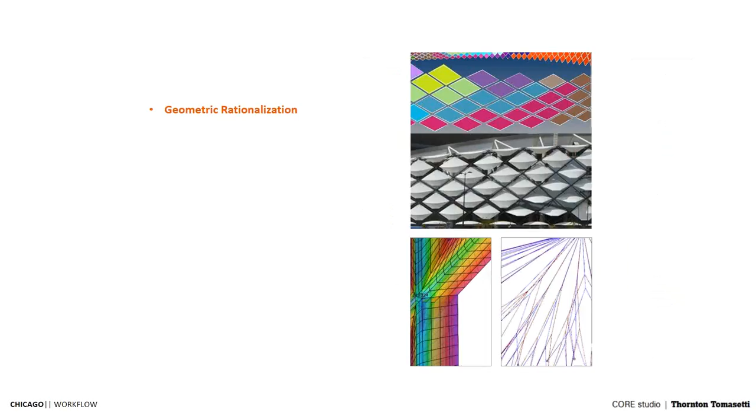So some of the things that we do in the group: geometry rationalization, fabrication modeling, integrated building analysis. This is like building platforms in Grasshopper and other software to do analysis and have this automation. We do software development. We've been doing a lot of work with Dynamo, Grasshopper. So if you want to download this information, Food4Rhino would be a good avenue.

We put the software out there. It's for free. Most of our Dynamo add-ins and plugins are free as well. We do a lot of work with Autodesk, and anything that gets built in the additional releases, we put some input. So if you have inputs, if you know something that might be interesting, you can send me an email, or I can give you the email of one of the guys in our group.

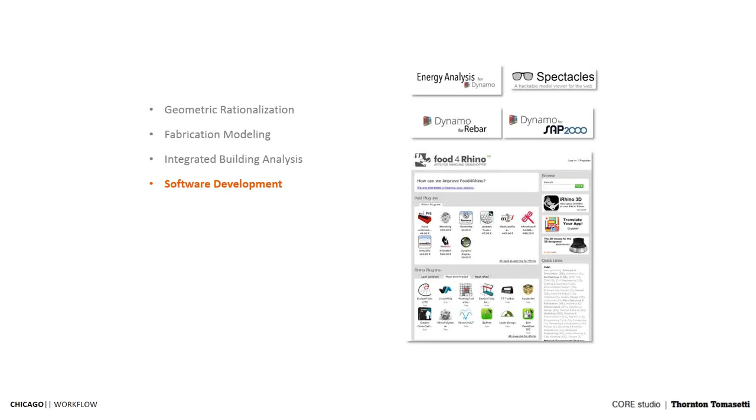We have an internal tool called TTX that allows us to interoperate between different platforms. This tool will allow us to bring elements from Grasshopper to Revit to Tekla to all these other platforms. It's a platform that we've had for the past 4 years. I'll show you at the end that this is migrating to a platform that you can be part of now, that you can beta test and install on your machine.

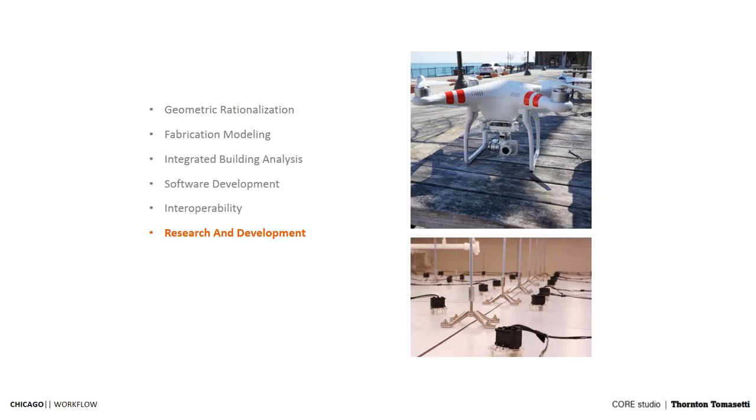We do a lot of research and development. I'm part of that group as well. We do a lot of photogrammetry, drones. We're getting involved a lot with 3D printing with some companies here and some others in research and schools. We've done work with a company called Branch Technology. I don't know if you've heard of them. We design things with them, so it's pretty exciting. We used to do a lot of physical prototypes, but actually we're not doing that anymore—it's pretty time consuming. We do training, hackathons, and symposiums.

We also do specialty projects, like working with a lot of artists who don't have regular projects to work on.

Feel free to go ahead and check out the Core Studio website—we have a Twitter account, and I think we have an Instagram account. I don't manage that, we have somebody else who does, so I don't know everything that gets put in there. But I know if there's a job posting or new things, they'll come up there.

Our Core Studio page does have some of the things that are going to come up in Dynamo 1.2, and this is all work by Max, the guy I told you is a Revit guru in our group. Some of these we're implementing right now.

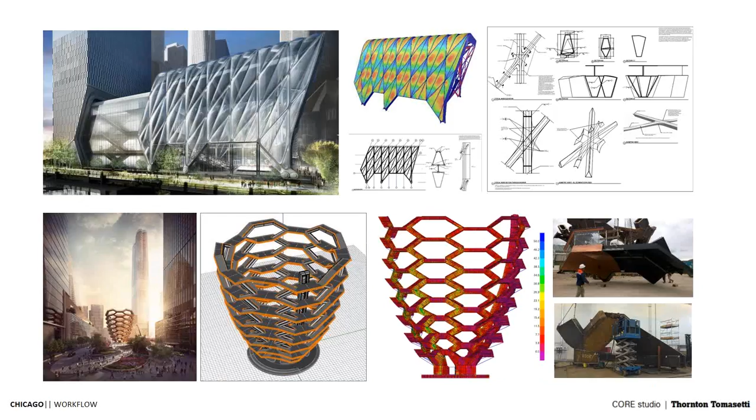Some of the work I've done with the group and the company are just quick highlights—ranging from small prototype models and physical analysis, to a bit more mid-scale complex modeling and fabrication, to something larger that I get involved in. So there's a range of things the group gets involved in at the firm. We have a pretty good portfolio, going from tall towers to very small work. It's always interesting to get involved in those.

Lately we're getting more involved in using Dynamo to automate processes that engineers find tedious, or that our drafting folks find easy—like creating a rebar plan from Excel and then automating that process. I think it's a good platform to explore in the firm.

It's pretty user friendly. My background is architectural, and I was pretty good at Grasshopper, so for me it was a good platform to work with. But if you're starting from scratch, it could get a little complicated. Still, it's pretty good and self-explanatory the way it works.

The three things I'm going to touch on today are automation, 3D/2D cross-platform documentation, and how we're using TT and Dynamo as a community. At the end of the day, we're 1,200 people. We want to be able to reach most of them, or at least some offices, so they can do the same thing—not just us in Chicago or New York doing the work—so everybody's in the same ecosystem to work with.

The first thing is automation, and this is work we're doing with Bentley software—software you might not know because we use it for structural engineering. This Bentley platform allows us to build models for rebar, so we can analyze buildings and create rebar plans out of it.

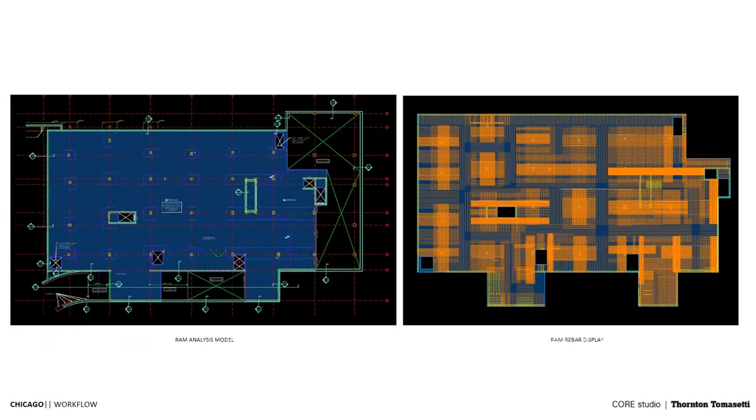But this started from people being frustrated that they needed to change this plan every time there was an opening or there was a different program added to the building, right? So every time you do this, you need to run the analysis and then change that, right? So the output we're using is an Excel output from Bentley RAM Concept, running this analysis, reading this Excel information, and obviously you have different tiers or platforms that you need to apply this information into. So we built a custom family.

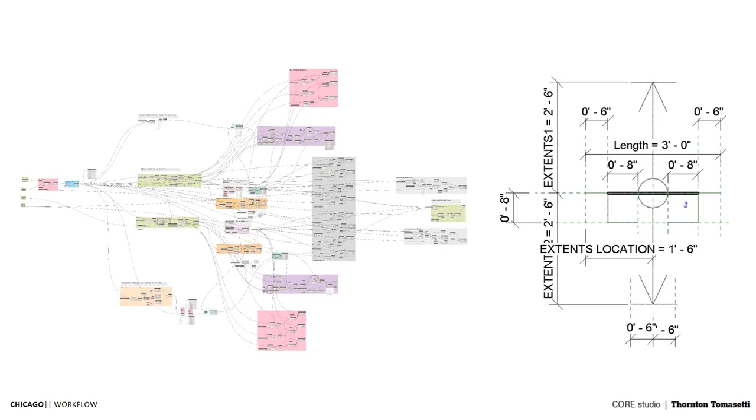I think one thing to take notice of is that to take the most advantage of Dynamo, try to build your own. This is what I've learned so far. Try to build your own families that can do something that you want them to do, right? So in this case, we're building families that will read the Excel and create a whole floor plan, right? And it will read that Excel and tell me whether or not it's a 90-degree hook or it's a span, or what is the size of the rebar. So if you can build that out, I think it's very useful.

And the output is in Excel, and I'll show a video. I have videos for all these presentations. But the basic output is just Excel, the level, and that's it. You read the family, put it up there. So I'll show a video of it. So like I said, a lot of this work has been done by our folks in the DC office. They've been doing a lot of work with concrete design and buildings.

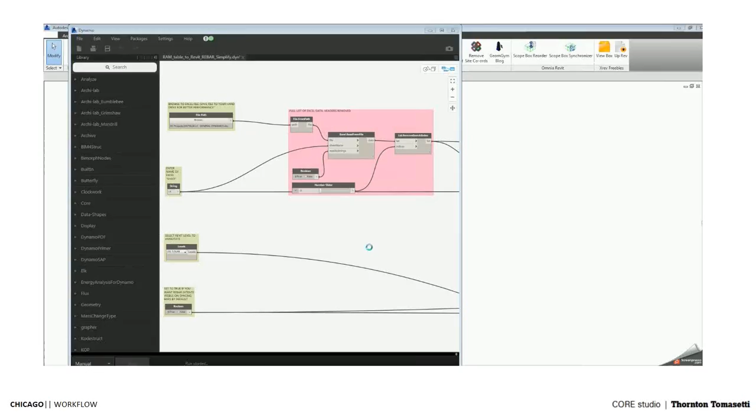So right here, I'm just looking at the different outputs. I'm just reading an Excel, reading the worksheet of the Excel, the level where it's going to get applied, and then a Boolean true or false. The rest of the definition is built into top rebar or bottom rebar for the plan. And at the end of the day, they're creating detail groups, and we're grouping them according to the date. And if you need to change that, then you can delete that group and just rerun this application and create that plan again.

So right now, it's just going through the process of reading the Excel, and you'll see in a second how this works out. This is one floor at a time. This is one floor at a time, but I would do it one at a time. Yeah. You could probably automate that process, but you want to look at what the outcome is and how that works out. So right now, I just read the file, and it creates a group, and it automates the placement of the rebar.

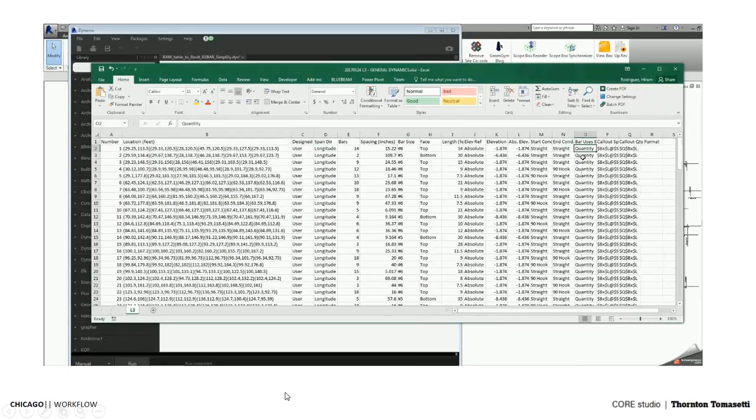So one thing that you can take away from this, I think, is that you can do this in plan for documentation, but you can also do it for 3D. You can actually draw the rebar if you wanted to, but my experience is that you don't want to do that. If things are going to be changing all the time, you just want to create a detail group that allows you to tag it with the correct rebar size, and if anything changed, just change the Excel again. So this is just showing the extent of where the rebar should be placed.

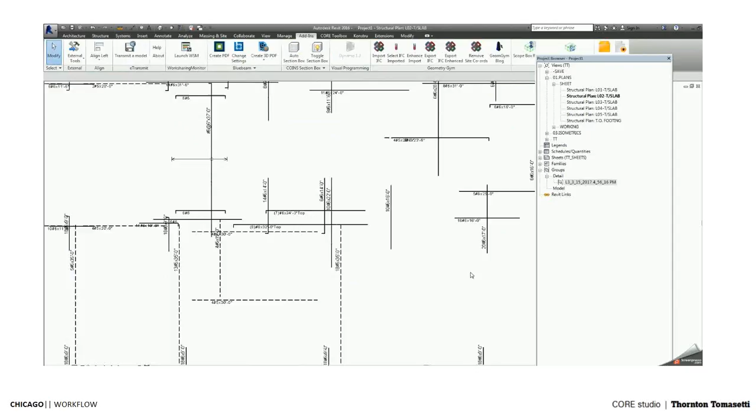And at the end, like I said, it was just creating detail groups with a date when it was developed. This was useful for other people to see when the rebar was placed. For some of these models, if you're doing this automation process, you want to be able to see who did it and at what time they did it. So at the end of the day, this is sort of the output of the process, and then you can share this. I think this was in construction documents. So we were doing this for this project.

yeah. If you have any questions, or if you want to stop me in some of these, it's fine. Just do it. JJ is a structural engineer with our group here. He's in charge of the tall tower design. So if I show some of that, he did this.

So you're a plant. I'm a plant. So if you have any structural engineering questions, you can ask him right here. Free consultancy right here. No, it's pro bono. Yeah.

Sometimes the tags in that program are overlapping, and you have to move the tags around to kind of make it look right. Do you have to do that in the program first before you run this, or how is the tag set up? That's good. We set up according to the file, to the model, right?

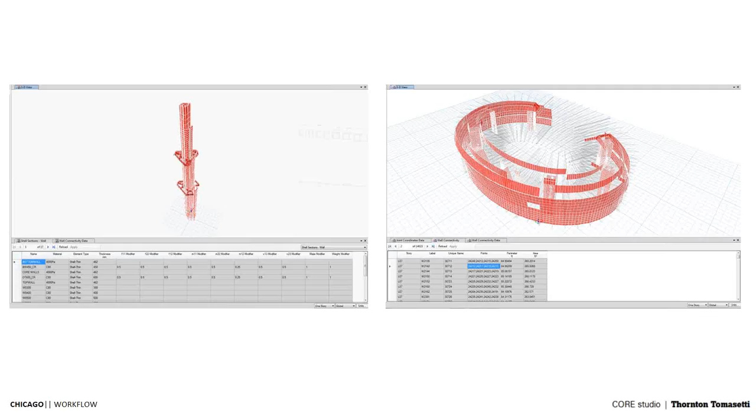But for some of these models, the problem also is that the walls are tilted and have a slope. We have a project where some of the walls are going backwards or have a tilt. It can be a little bit painful to draw those in Revit, so we're trying to find ways to do that and also assign the correct family to the walls.

In the end, you can get an Excel output from that platform, and then start playing around with creating planes and faces that you can then use to create walls. This is still ongoing, but we made progress. This is something that's going to come up soon in the new release for Dynamo, so you can create walls from faces.

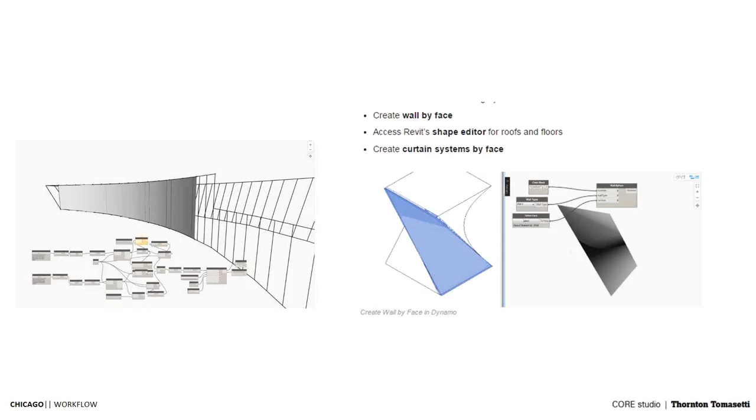So if you can create a face like, let's say, Richard Serra sculptures, into a sort of weird shape and import it into Revit, then you can select and create a wall out of it, which is going to read better in your plans, and you'll be able to tag it and do elevations and all of that stuff that needs to be taken care of.

Another thing that comes out of this Excel output from the engineers' platform is that you get the section property of each of these frame elements, or shell elements as they call them, and you get a location of that face or wall. So we're taking that into Dynamo to automate the placement of those walls with the correct size, and at the end, having a color code of those elements that got created, so not only the engineer, but whoever's using the model can see that a color represents some sort of logic.

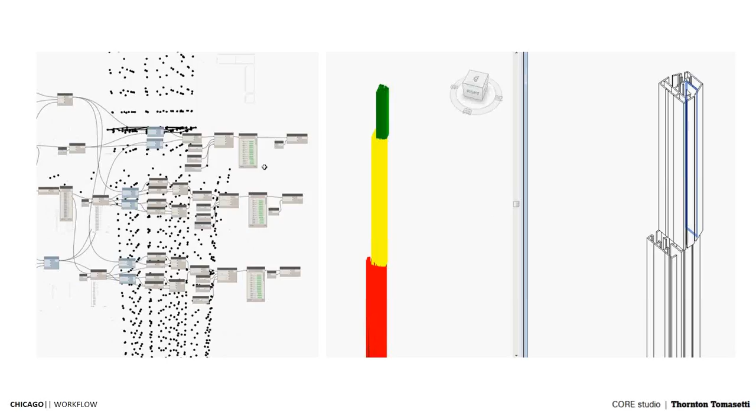In this case, it's based on tiers, but for this example, we're color coding them based on wall type. One thing that came out of this workflow was using group by keys in Dynamo. If you haven't used that, it's a pretty cool thing. If you have, let's say, 200 elements of the same type, and you have 3 types, you can group them according to each of those types, and that way you can create your walls, whatever, facade.

So if you have a facade with 3 different panel types, you have an Excel with all your facade types, and then you can automate processes that take those types, group them, and change them according to some parameter that you want. So this is basically doing that process.

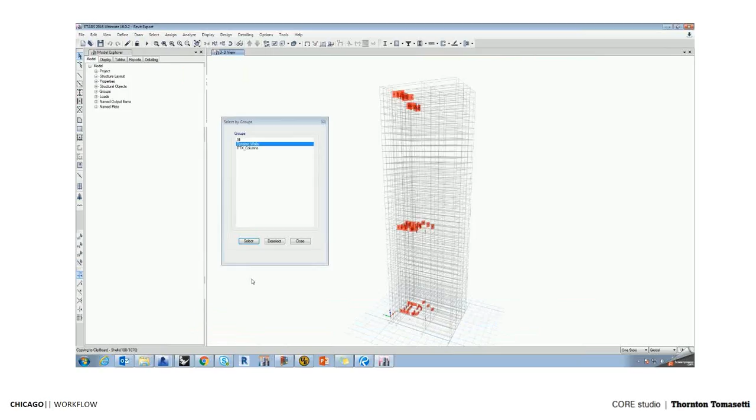We're taking this Excel output and then reading that Excel into Dynamo. And like I said, all we're using here is out-of-the-box nodes. So we're using the Excel reader from Dynamo, and the Wall.ByCurve from Dynamo as well.

And just to know that once you have this, you can create groups, and then it's just a matter of seconds to update those walls if the model changed, or there's different elements that need to get thickened up, or the architects need to see different changes on them. So this is just going through it. I think I'm using one element here that duplicates families to create my walls.

So in this, it just creates all the walls, and it gives you at the end of the definition a color code based on thicknesses. So you'll see that the major thicknesses are going to be the red ones, and your thin walls will be in blue or cyan. So you can assign this, and you can just create some sort of template.

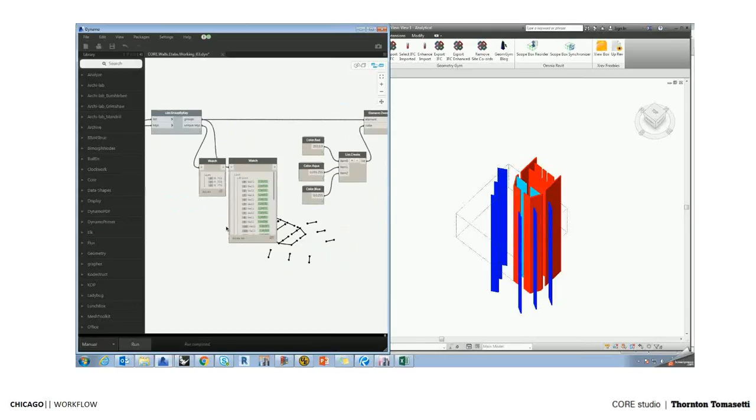If it's consistent, then you can send that out to your staff and say, okay, this color's this, this color's that, every time you see them. So this is what I was talking about. Once you have that, you can group them by a certain type. So I think that's it.

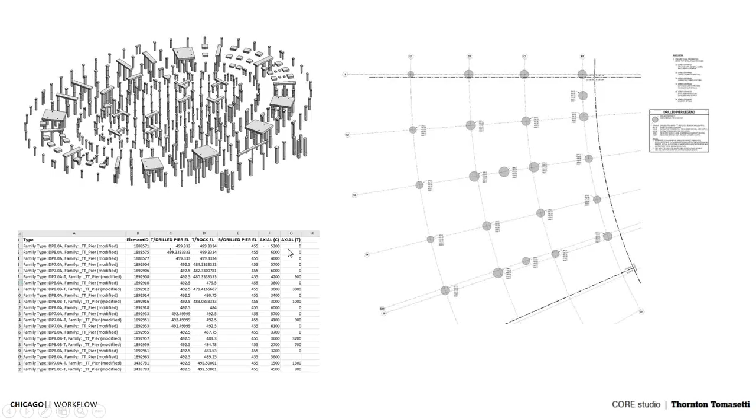Another thing that we're using this to automate is this kind of work for drilled piers, and this kind of annotation in plans. So this was a project that we have in house, and one of the tests was that the pier needed to modify the drill information, and the top of rock was changing, and some of these forces had to change as well throughout the project. So again, this information is what you end up having, but to change this, you have to change, let's say, 5 or 6 parameters per element, right?

So the way to do it is to, again, use Excel. Most of our engineers are pretty well versed in Excel, and they use it for everything. So sometimes you have to leverage how to use those platforms well. So they already had a pretty good Excel file that they were using to automate some of these inputs, but they were just lacking the process of bringing that into Revit, and using Dynamo was one of the options to do so.

So at the end of the day, you can see that the pier family had different attributes, and you can add your own attributes now, project parameters and shared parameters, to Revit using Dynamo pretty easily. So we were just adding element parameters that we can change from an Excel output. One thing that we wanted to have was the element ID. So you always want to find that element ID. You can find the GUID of the element, put it in there in Excel. But I don't know if this seemed to work well.

One of the things to notice here is the formatting of the structure of the output. If you want to format something that has a title, all the elements of the title and then the output as such, the way to do that, I don't know if you know this, is to use a transpose of the data and add all the elements that you're looking for at the beginning. So that will generate a structured Excel that you can use.

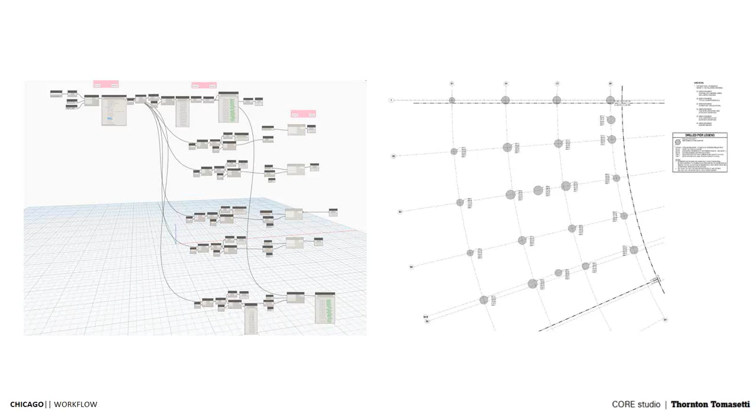Yeah. So all you're doing here in this definition is reading the Excel, and in the previous, I don't know if you saw that, but here one of the parameters is the ID. So I already have the parameter ID in there. So all I have to do is just call out that parameter back again and make sure that's the one that I have in Excel, and then just put whatever it was in there.

Does it recognize it just as element ID in the name of the parameter? Yeah. Whatever it says in there, that's whatever you're gonna have to write. Did you make like a master list beforehand or something, or was it by points, like points on an analysis model or something? No, what do you mean by points? Well, I'm guessing those forces and stuff come from some analysis model, so those all have some sort of IDs associated with them.

Yeah. What was the process? Did somebody just go through at each point and then make some sort of master list? There was a mapping exercise in Excel where you had to take those forces. So this pier mark had already been in another Excel where all the forces were already tied into those. So once we brought some information of those references into the new Excel, we were able to just match those back.

But yeah, the engineer had to do matching in Excel, which is pretty straightforward, I think. Sure. I was just wondering if you did something a little smarter, where you took the point coordinates from the analytical model and the point coordinates that you got. No, because the way they were doing the analysis or the forces was a lot of Excel work, and some of the models are not coordinated in the same location. Right. I've seen that. It's pretty typical, and it will take more time.

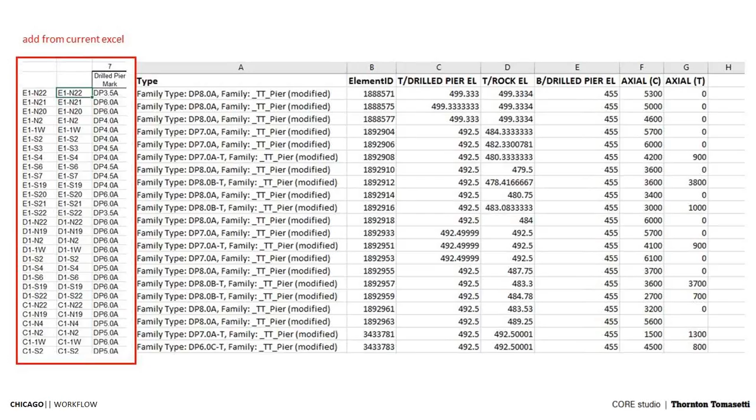So the next thing we're doing is Bluebeam and Dynamo. This is a plugin that just came out a couple of months ago. Again, the guy from our office is doing this on his own. It's called Dynamo Bluebeam or Dynamo PDF. He's using it for some other stuff. I started using it for notations and markups. So we're trying to find a better way to annotate our sheets and our details if anybody has to change that, and we're using this platform to see if this flies.

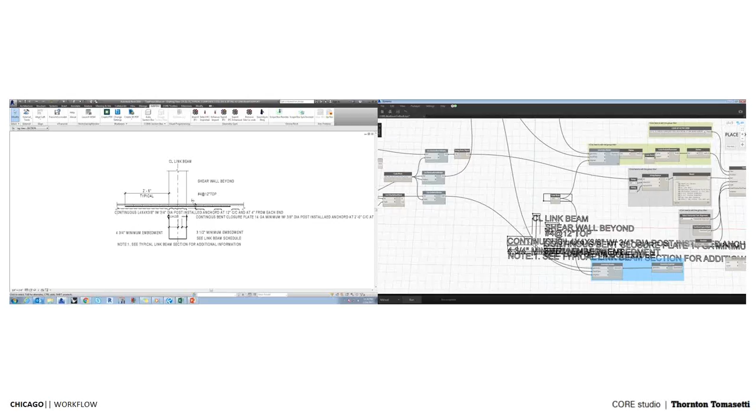For me, I've been using it, and it's pretty straightforward, and it creates pretty good legends, and you can tag, create clouds, and create all the text. This came about because I was working on a project and I was getting frustrated that some of the notes were getting put in incorrectly, and there were misspellings and all that stuff. So you want to be able to check that this information gets put correctly, and make life easier for these folks. So we're trying to use this to automate the placement of notes.

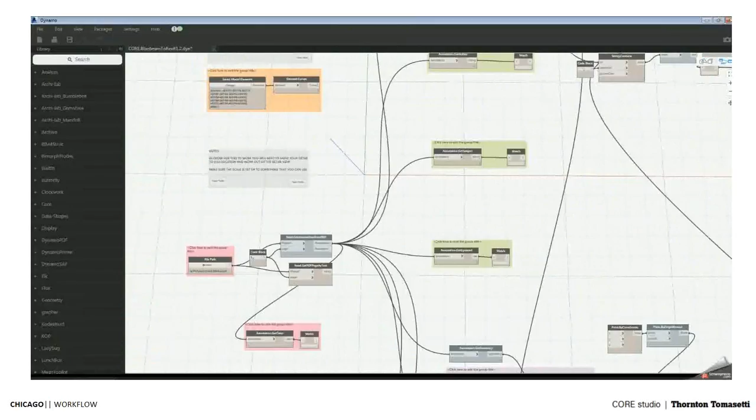So in this part, we're just reading the PDF. The definition, I don't have it open, but all it does is take all the information from that PDF, all the line work, all the notes, and you can extract that in Dynamo and use it for your own goals.

Like I said, Max, the guy who built this, was using it more for building masses. So if any of you guys use Bluebeam and you start sketching elements, you can take those elements and do some sort of massing, or openings, or whatever you want. I'm thinking more of how do we implement this for the BIM staff, right? How do we create some sort of workflow where they can take all the plans and just automate the placement of text or clouds in the sheets.

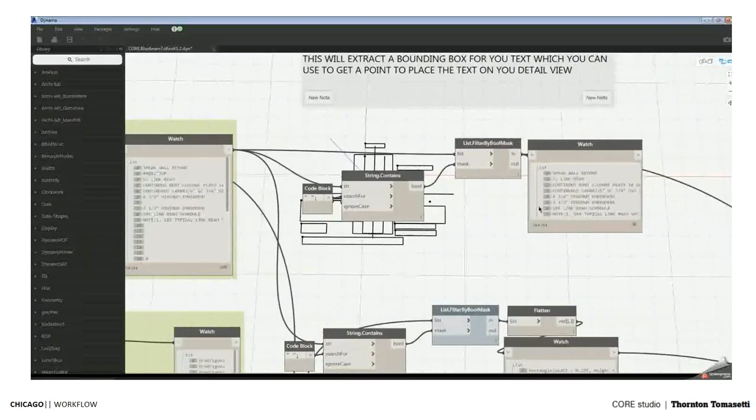So here it's just reading those: it's reading the Excel file, the PDF, reading the cloud, the text, and I'm using different colors to differentiate the things that I want to have in Dynamo be written. So all I have to do is select the ones that I want, do a simple filter by Boolean, and then just filter those things out.

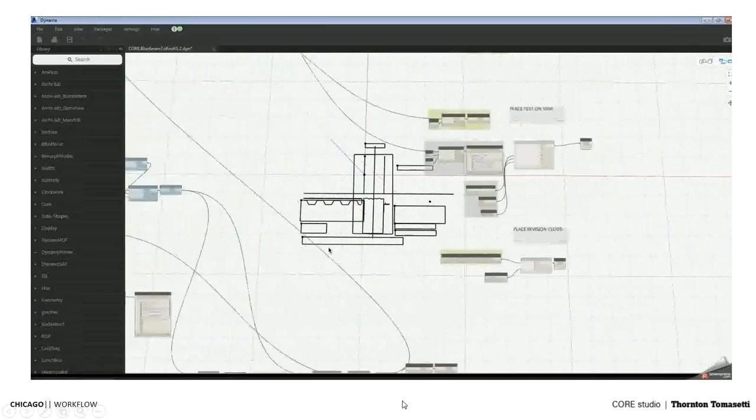So one of the things you can also read in the Dynamo PDF, I should say, is the content, who did the changes, what date, and color. Right now it's also reading subject content. So if you put, let's say, a line and you add a comment to it, you'll be able to read that comment. So once you have this, use current nodes by Dynamo that you can add text, and all I'm doing is placing a text in a point within the sheet, alignment, horizontal, and the view.

And I'm also doing a revision cloud, because I know my PDF has a revision cloud, and this is already part of Dynamo. And you can add whatever revision is in that present model. So once you have that, add that revision, structure this, all you have to do is run the definition.

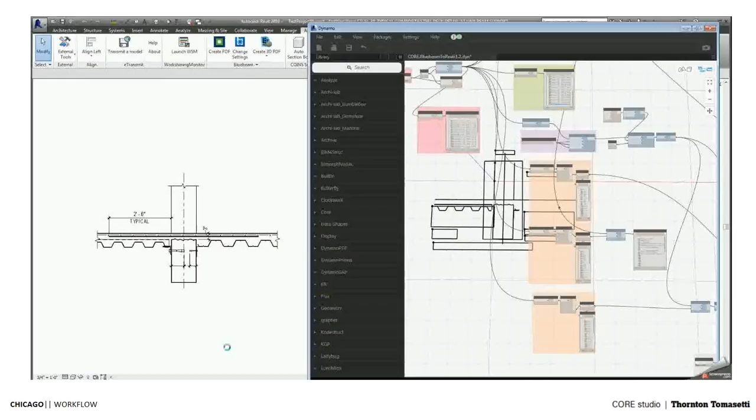So I gotta say that this, you have to customize for your project. I found that it works pretty well, but you have to first define the definition within the project scope, meaning like what are the sheets, where the revision clouds are going to go, what kind of tags there's going to be, what kind of text you have to use for that project itself.

So at the end of the day, it just creates all this, and then you just have to... it doesn't read it as paragraphs. The only way to do it is if you do a long text. So if you do a paragraph in Bluebeam, it will not read that for some reason. That's a bug. But it only took a few seconds to do this, and I know it's the correct thing,

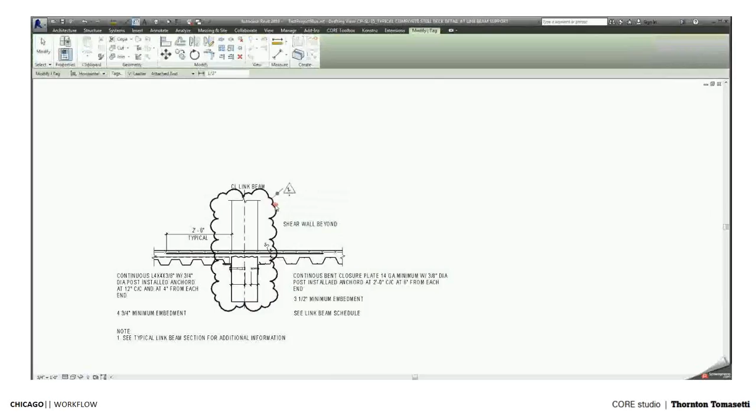and I think it's just kind of cool, because we were talking about this last year, whether or not there would be a plugin for Bluebeam that will read line work, and people were very scared, like, oh shit, people are gonna be doing this and then it's gonna go crazy. Like they're gonna do it incorrectly. But if you think about it differently, I think it could have a good potential. It all depends how you use it. We're using it for this.

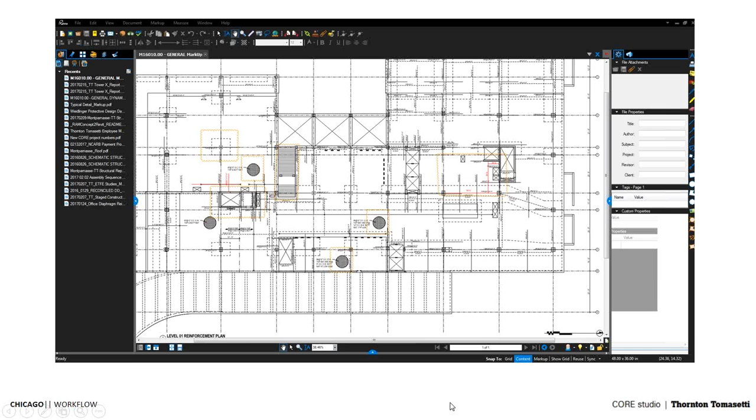I'll show another example where I just used it recently last week for a deadline where I was helping a team. This is the only free thing, I'm not advertising that. So we're doing clouds, tagging, but this came out the other day. I was helping this group here in the office, and we had a deadline. And the roof of this cladding for this building is not straightforward. It's not flat. It has valleys and it has curvature and all that stuff.

So the engineer drew this, and I work with them a lot. And so I was like, how do we make this process a little bit more smooth and see the outcome before we put it up in Revit for documentation. So again, we use a couple of things, right? Just use the grid line to get the scale correct, dimensions and stuff like that. But we use Dynamo, again, the same platform, for Sandbox instead of for Revit. So if you're familiar with those two, standalone and the add-in for Revit, it works the same for Sandbox, which is the standalone.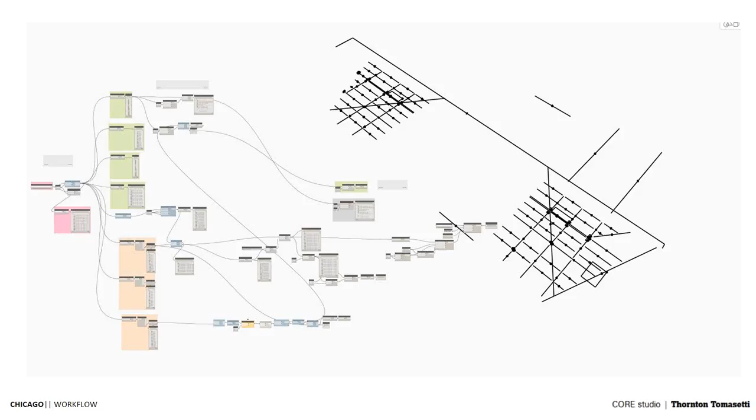So I'm just reading this information straight from the PDF and using Rhino to create line work out of it. So the way I'm using this is because I want to reference this geometry before it goes to Revit, and like I said, it's not such a straightforward model or building, so I need to reference that to a specific level, extrude that, and make sure it doesn't hit the cladding, and that we have clearance for the gutter and stuff like that.

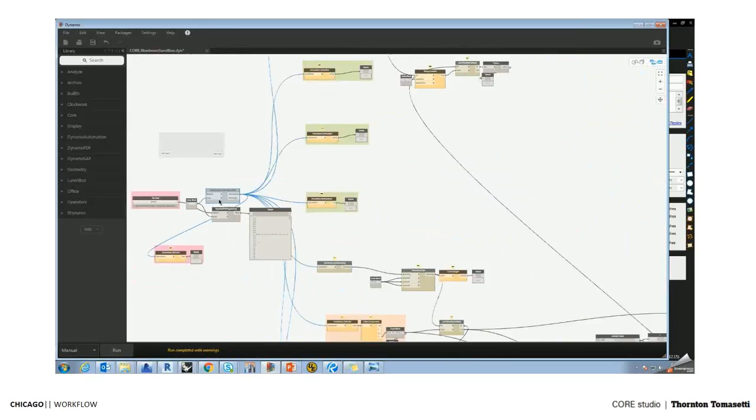So I work a lot in Grasshopper and Rhino, and the best platform for me is to use it. So we're trying to use this, and this is just a video of how we implemented this. So it brings everything. I mean, I could ask the engineer to color code the moment frame or the girders or major elements, and I could just have that be a layer in Rhino that I can then use. So here I'm using the same process, and you can see that you can read the entire PDF. You can read all the text in there. So there's all the grid lines, information, construction, project information.

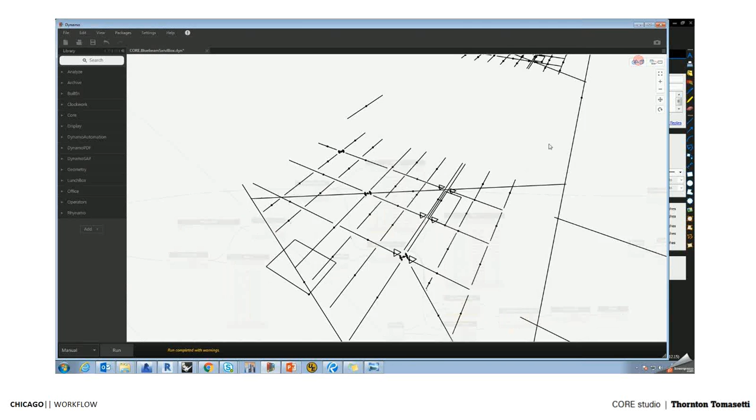Some of this was going to go that same day or the next day to the architect for coordination. So at the end of the day, we just took a bunch of lines, converted them, and created a Rhino model with the exact dimensions. Once we had that, you get a flat model, which you can then use as center lines for your structure.

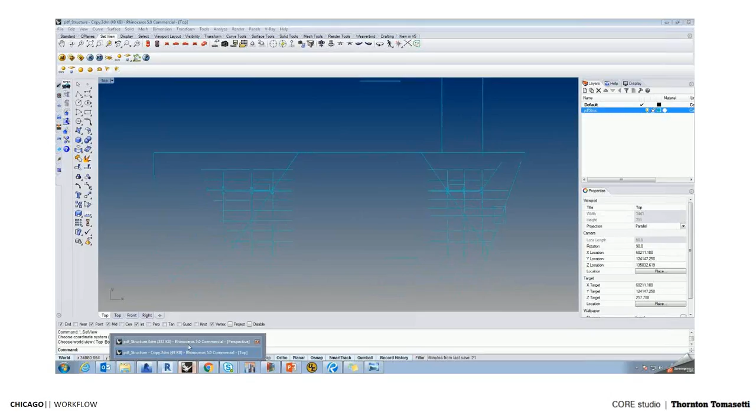All I'm doing is projecting onto a surface, offsetting, and applying some sort of section that I can see. You'll see the second step is that. So at the end of the day, this is it - it only took about an hour and a half, two hours to produce this, which I can reference. I exported an FBX from Revit to reference my geometry and see what's going on.

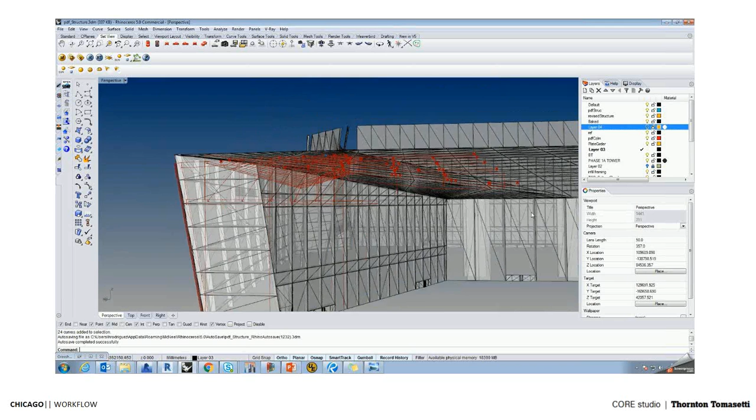At this point, we saw that some of the geometry had to change location, and we were pretty off from the cladding, so we had to revise our structure. In this, you can see the cladding and the different geometries superimposed. It would have taken a lot of time for somebody to draw this in Revit and then find out it didn't work. We wanted to look at this prior to that and say, okay, this works.

We'll just bring it in the way it is, and then we'll deal with it in Revit once we get it. Somebody tried to do it and it was like, oh, we got to build all these planes and offset from plane, and I was like, okay. So I think this is something - I don't know if it's useful for you guys, but for us, we found something we can use.

So that started as a 2D sketch that was just annotated with the heights and so forth? No, it was never annotated with heights. It was just 2D, and we already had a model that had the cladding from the architect. So we already knew where I had to project my geometry to, and then offset from there, and just draw a top of steel of the beam center line. So there are two inputs: the 2D sketch and the Revit model.

Yeah, okay. And then once you have that, it's a matter of checking the model, because the worst thing is checking the drawings and finding the thing didn't work - it's like, oh, now I have to move my whole frame a certain distance and it doesn't work out. But yeah, we're trying to find different ways to make this happen.

A lot of our engineers and staff are very well versed in Bluebeam - they like to use it a lot, everybody here. So if we can tap into it and try poking around, and let them use what they want to use, you've got to conform to those things and find better ways to use it.

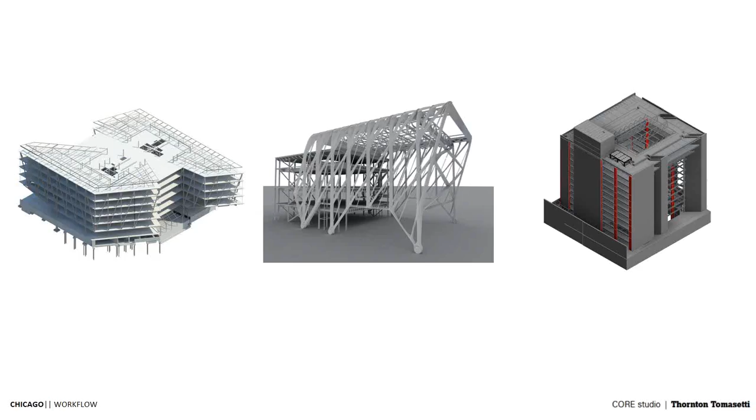These are 3 different projects I worked on in New York: Cornell Tech, Culture Shed, and another project I don't know if I can name. At the end of the day, this is information that lives somewhere that somebody manages. That group is trying to find out carbon footprints for every building we design, and whether we're meeting criteria, doing LEED certification, and all that information.

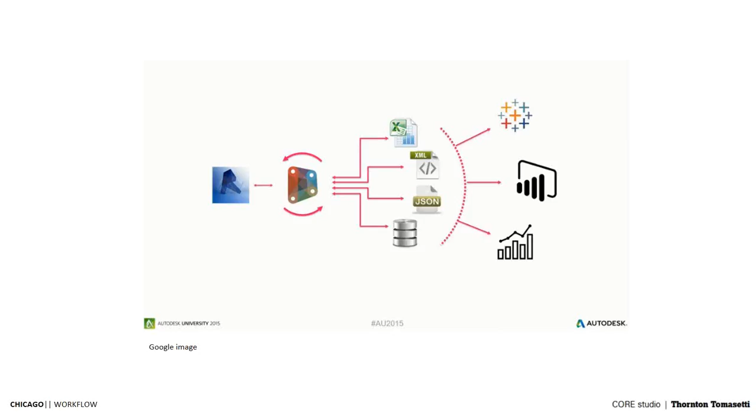So we're using Sandbox or Standalone to automate some of these takeoffs. I don't know if you guys use the standalone version of Dynamo, but you can do all the modeling, though you won't be able to access the Revit nodes or most of the packages that people write. But there's one I use for this, from the guy who does Clockwork.

It's called Dynamo Automation. The way it works is you have a master graph, he calls it, in the standalone, that can open as many files as you want - Revit 15, 16, 17, you just have to give them. And then what you give is what he calls a slave graph, another Dynamo definition you build to do something inside that Revit.

So imagine you run this definition and don't want to open 10 files - you just let it run overnight. What it does is open that file, open up Dynamo, read the information from the Dynamo definition, and then close. Then it goes to the next one and back again until we finish the whole thing.

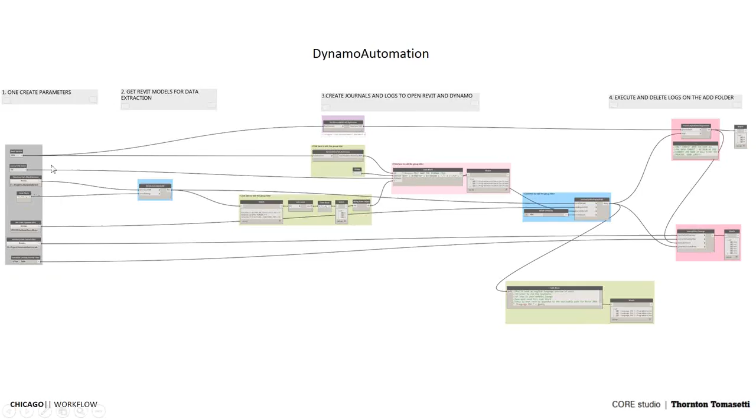So the way we're using this is that definition - this is the definition I have for automation. It's very simple: you give it the location of the files, the type of Revit, and then it creates sort of a journal that it reads and executes.

At the end of the day, I built this definition that just takes takeoffs of building quantities - tonnages. We're looking for structural steel, slabs, foundation, you name it, everything. And we're also looking for structural materials - whether it's what kind of steel grade, what kind of concrete they're using, what kind of metal deck they're using. So if they're doing it correctly, then the model's going to be correct.

But this is something that has worked pretty well. So you can run this - if you have something you're running all the time and you just want to run it, run it through Dynamo automation. So that's kind of what they're using it for.

So the output is like this. For example, for this building, we put in outputs of project data - who built the model, what time, what project number it is, who's the project architect, who's the project engineer - all the information we can, so we have that in the database.

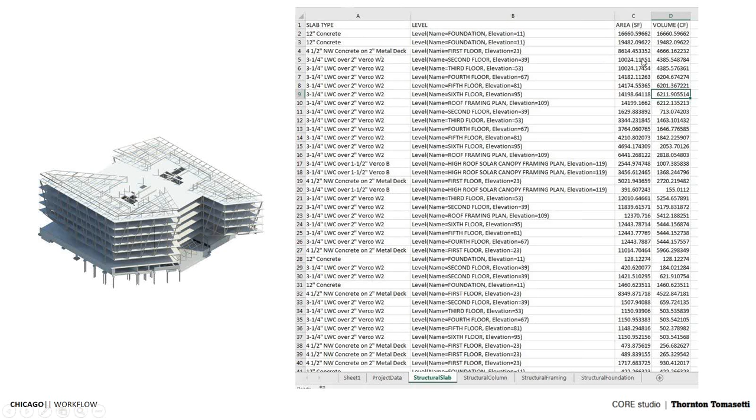But we're also extracting structural slab - what kind of slab, where it's located, volumes, areas. So this will help us achieve the kind of goals they're looking for.

So once we have that information, I started thinking of how to use it for other purposes. I don't know if you've heard of this tool called Design Explorer. Are you guys users of Grasshopper? Anybody here? No? Okay.

Okay, so Design Explorer works mainly for Grasshopper. It's something you can use to visualize, let's say, 400 inputs or 5,000 inputs - you visualize this as an input, and then have some sort of output that you can sort through. It's mainly an Excel-based application with some images and JSON files that you have to create.

So the way I'm using this platform is to actually go through my information and see what kind of models I have. This is just going to go through a very simple exercise of the page, how that works - doing some facade analysis of, let's say, a module that has some sort of depth, window to wall ratio, and some orientation. You can model this and have some output.

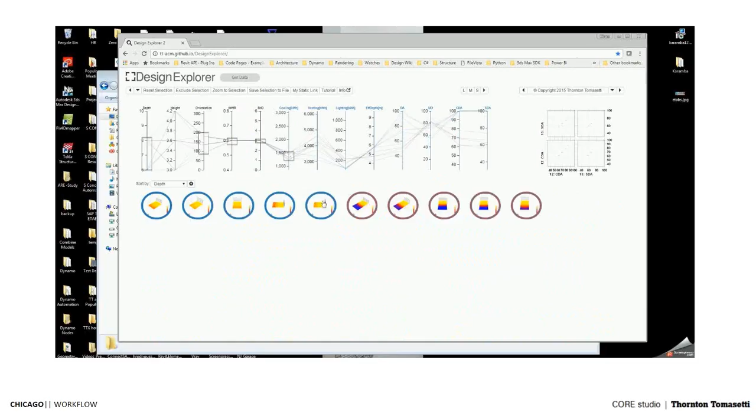So what this allows you is to filter through all these parameters and get what you want. You might want something with a height of 4, but an orientation of 50, and maybe a window to wall ratio of 0.4. It gives you a bunch of options you can pick from that iteration, and then you can select the one you want.

So this is how it's being used right now. The idea came like, okay, if we can use this information, why not use the information we're extracting from those models to visualize something on the web?

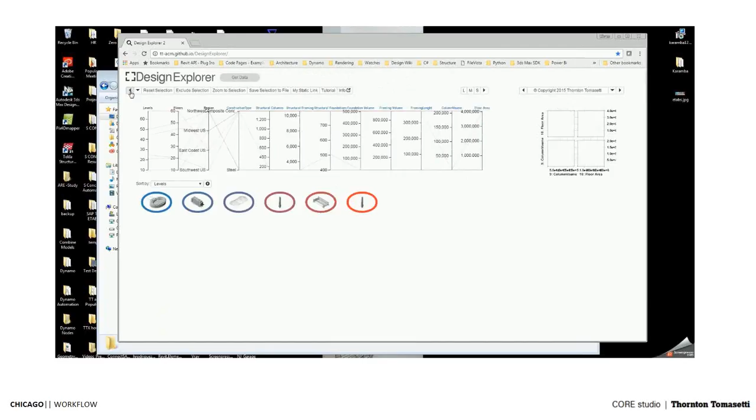This is mainly for our project engineers and PMs. Let's say I'm working on a region on the West Coast. I want to filter through all my projects on the West Coast and visualize which ones come close to what I'm designing. So let's say I'm designing a school with some specific parameters.

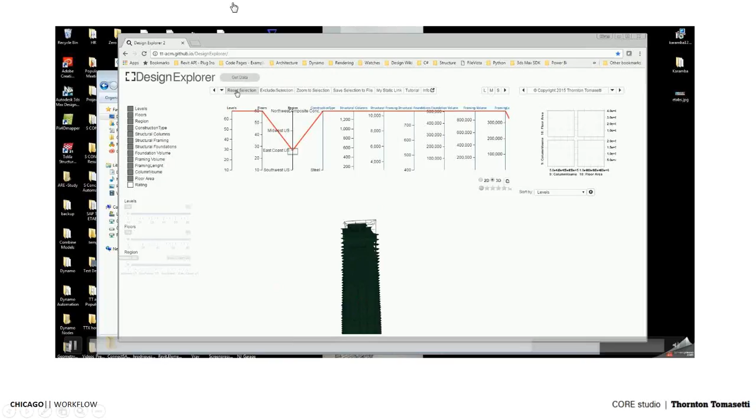Is there something in the TT portfolio I can access quickly? Once we collect this information, we can filter to find that project and show an output right there to the client. Since we already have the BIM data, we might as well harvest it somehow. For carbon footprint, we could get an output that says, show me all the buildings certified for the Northwest region that are composite concrete or steel.

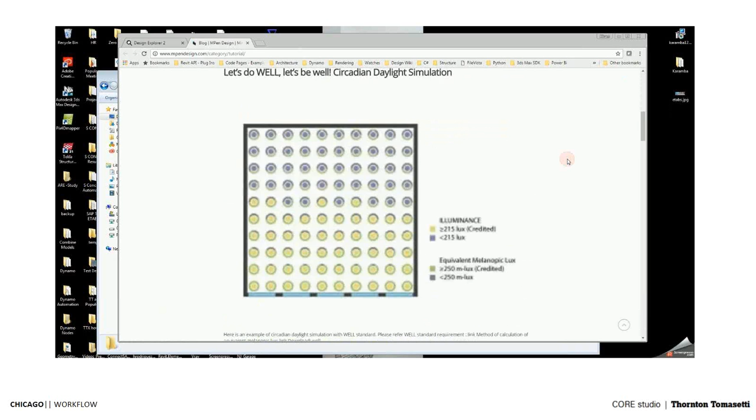This came up a few years ago from a group called Case. They used to build applications for different firms, including one to filter all the wall or partition types and see which ones were being used the most in the company and which ones worked the best. So it kind of grew from there.

How do you harvest your information from Revit? I'm sure all your firms have different projects. How do you visualize all those projects at once? That's something that came out of this exercise, and if you don't want to sit around doing it manually, just use Dynamo automation. The other thing that came from this is creating reports.

Since we already have that information, I don't know if you've used Power BI by Microsoft. If you have an Outlook account, it's free. All you have to do is create a table in Excel and upload it, and it will visualize that information for you, which is pretty amazing.

For example, this one only took 39 seconds to do the collection, and I think I have it open already. All I have to do is upload that Excel file to Power BI, and it automatically creates an interactive report for you.

This might lag a little, but if I want to see where my 12-inch concrete is in this building, it will show me it's all in the foundation. Where's all my metal deck? You can see most of it is within these floors. It tells you the volume and all that information. You can play with this data — it doesn't have to be just foundation or slabs, it can be anything, even programs within Revit.

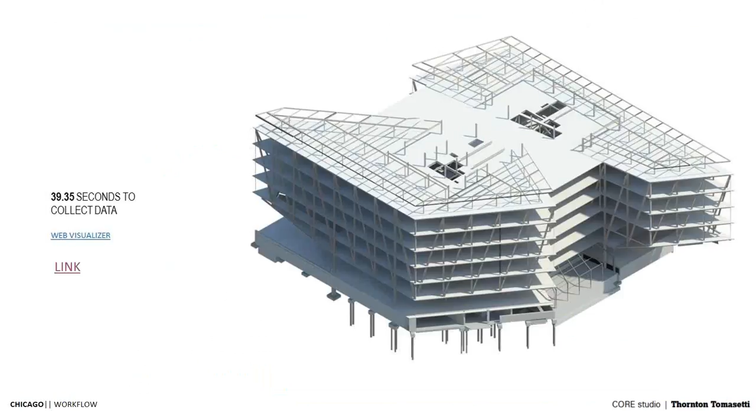So yeah, that took just a couple seconds. You can share that link and go from there.

The next thing we're going to talk about is how we work with Rhino, Grasshopper, and CAD. We use these platforms mostly for complicated geometry that comes my way — like, can you do something with this? We need to document it in 3D, 2D, and bring it into Revit.

Some of the initial steps are to do it in Grasshopper and generate a logical typology for that diagram or structure, and then share that with the architect.

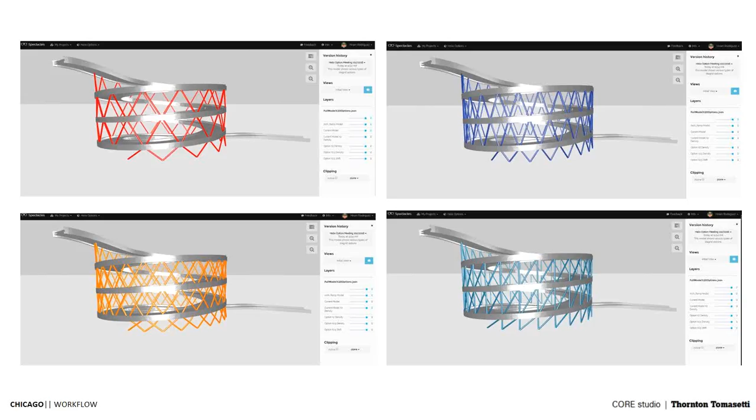We have a couple of platforms, and this one is called Spectacles. It's free — you can upload your BIM models to the web and share them with anyone, free of charge. This is part of Food4Rhino that you can look for. The idea is we were able to share this parametric model with the architect early in the design, pick the one we wanted, and document that in the sheets in the Revit model.

For this project, we knew it was going to change, so we didn't want to spend a lot of time on this process. We used Dynamo to bring in some of the 2D documentation for the model, using DWGs to bring in that data.

We're using Bimorph nodes — I don't know if you've heard of this. Somebody out there built these nodes that will read DWGs into your model, so you don't have to do a container file and explode it and bring it in. All you have to do is read the layer of that CAD file and assign it to the correct pen style in your Revit model, and then you have a working model. So I'll show that.

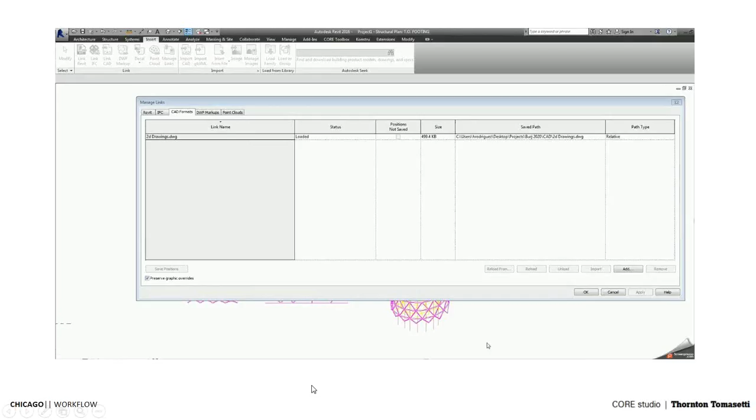And let me know if I'm going fast or not, and we can look at it a little bit more in detail. But this is something that gets linked. I didn't want to embed the file into the model, so it's just linked in the Revit file. And you can update as many times as you want, and just take the same layer and just bake it all the time, or create a detail line if you need to. There's no need to come in, export, and explode things.

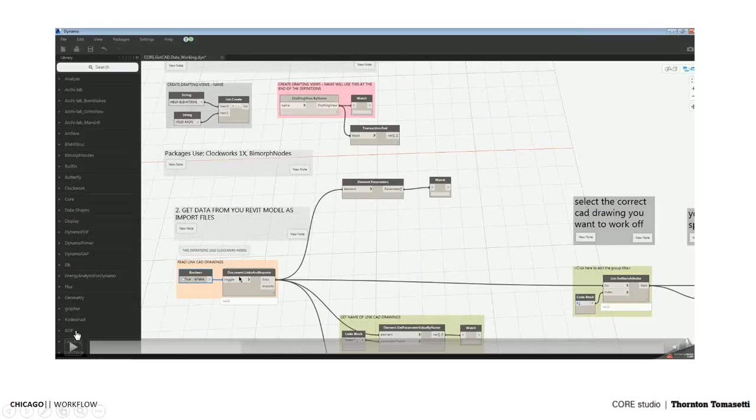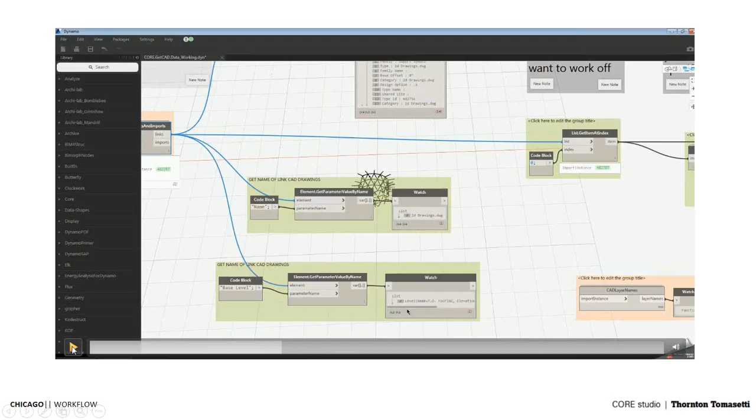So this is just using Clockwork to read import data into Revit. And once you have that information, you get two things. You can extract the name of the file and the location of the file as well. I found that it has been kind of frustrating trying to look for CAD files in a tower. People will link those CAD files to indicate edge slab or something else. So with this, you can get a parameter for the base level, and it will tell you where it is, and that will make it easier for me to go to that level and find the CAD file that's linked to it.

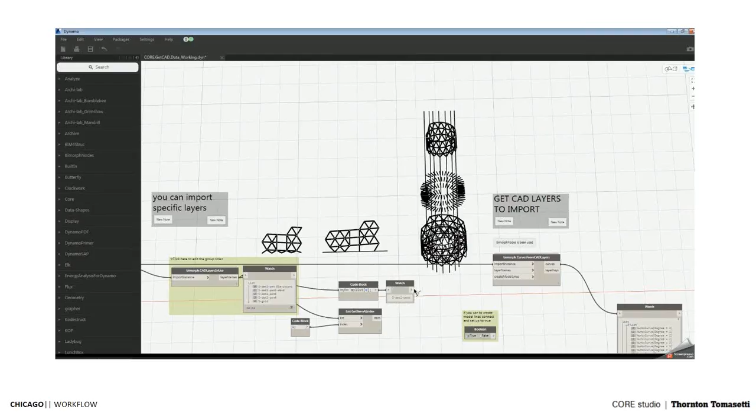But anyhow, what the node allows you to do is to take whatever layer in that CAD file and create your 2D drawing out of it. If you don't feed a layer, it will bring all the information from that CAD file into it. And you have the option here. This gives you the option to actually create the line work, but I'm using Archi-lab, Konrad's tool, to do that, and then just read my line styles, pen styles, and then just change that at the end. So I'm going to be using this for my elevation of that structure.

And here I'm just reading all my pen styles, right? So you get all your pen styles, you get them by name. And there's already an element parameter in the line types that you can change the line style, and all you have to do is just coordinate. We have pretty good standards with CAD drawings. So if I know that structural detail pen 5 is actually pen number 4 in Revit, then I can just match those and create that out of it. So yeah, this is important. The only thing is you have to do it at the end, once you get the element baked in Revit. Once you have that element, then you can change that.

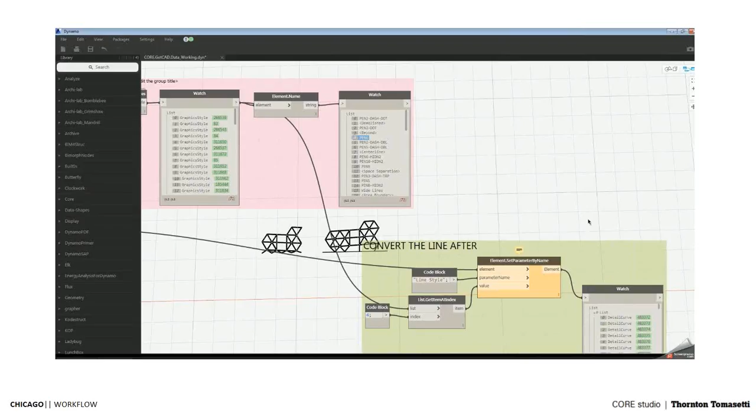I tried using Clockwork for this. It didn't work the way I wanted it to. So it depends on the model, how big and how complicated the model is. That's how much time it takes to create those line styles. But at the end, I would say it's a pretty clean process. Once you start exploding CAD drawings in Revit, you will bring all the junk into your Revit model. So at the end of the day, you don't want to have hatches.

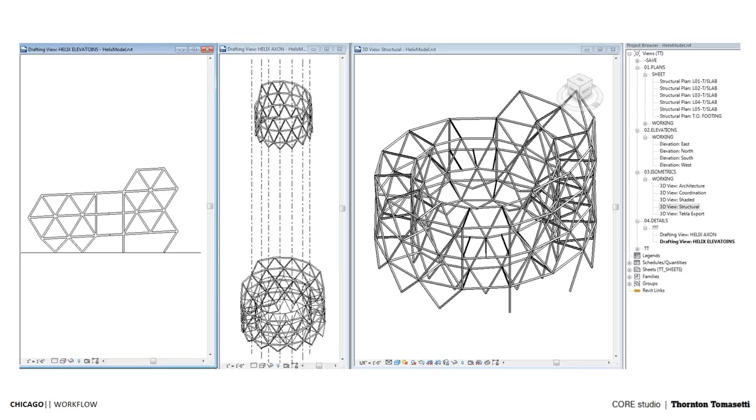So yeah, it's pretty straightforward, simple, and it creates pretty clean drawings and is easy to use. I love using it for axonometrics. They're my best things.

I'm going to talk about this project. This was actually one of the first things that we used Dynamo to bring in data to Revit. We were given the task to model 24 highways in California. This is for litigation purposes, and we had to get volumetric volumes precisely, and we had to get models in Revit format.

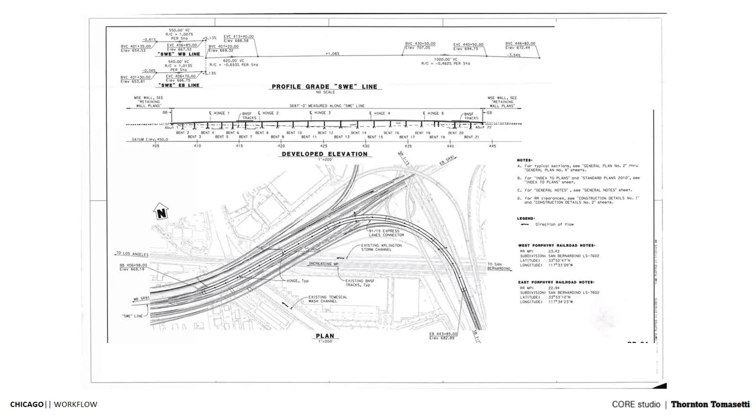So they were like, okay, what are the best formats that we can do this? One is, okay, so what do we have? They only have PDFs to share with us. So we had to extrapolate the information from the PDF and then create those models. So we just used Grasshopper to do this, to iterate through the design.

So at every bent, the highway is built in bents. So you get different connections, and then you need to have booleans, because between those bents, you'll have another element that connects both of them, and they're separate. And besides that, you have columns with capitals and everything. It has to be modeled correctly. So that was one of the criteria that they wanted to have.

So we used Grasshopper because we knew we could do Boolean conditional things. So we used that to generate these kinds of models, where we were able to iterate through the 24 different highways. And then at the end of the day, we were baking that into Rhino and creating the volumes in there. And we were just using some of the plugins that exist in Dynamo just to bring those elements.

Because imagine trying to build this highway into Revit. They wanted the precise volumes with the openings and everything. I was like, dude, nah. And then we want it next week, and like, nah. So it came to that point where we were using Dynamo to do this. When I first started using it, I was like, okay, this kind of works for me, and it's pretty good if you can do this.

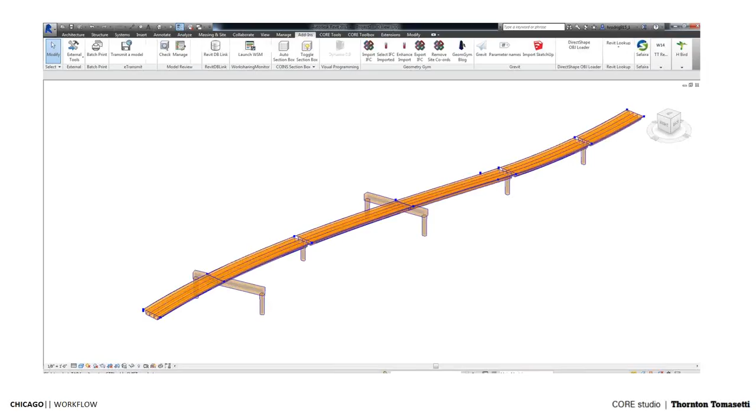So at the end of the day, we just brought the whole information, and we were able to deliver those models to them.

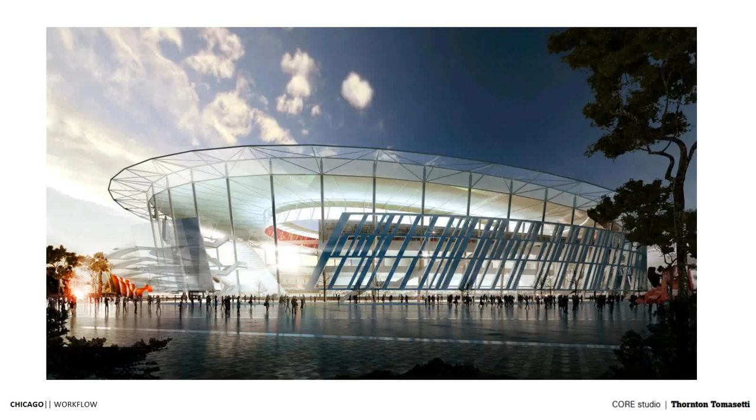Another thing that I was involved in is this stadium. It's in Rome, AS Roma. Most of this work was done in Grasshopper and some other structural platforms, but everything had to be documented in Revit precisely for the Italian counterpart. Everything that we got built was going to be given to the Italians for documentation and to proceed to finish the project.

We were early in the design, doing most of the design for the stadium, the fabric, seating, and all that. But every time we submitted, we had to submit a detailed model in Revit, so everything had to be coordinated with them. This is pretty standard with our group and these kinds of projects, using Grasshopper to come up with different designs, and you can visualize different histories of the model and different states of the design.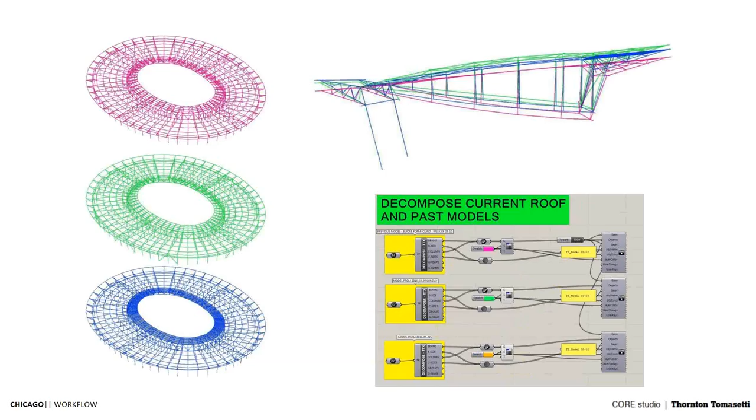And we had to coordinate about 3,000 frame elements, or structural elements if you want. This was pretty brutal, but we were using some of the platforms that I was telling you about to coordinate this with architects and the Italian folks as well.

One thing that we did use Dynamo and Grasshopper for was to coordinate line of sight. If you're in a stadium, you don't want the structure to obscure your view of TVs or the field. And since this building was going for a World Cup stadium, they had to build up even more seating. I think for a stadium to be qualified for World Cup use, you need a certain percentage of seating, and they weren't meeting that, so they decided to add more seating.

So we had instances where the structure was actually obstructing some of the views. So we had to rethink both the seating layout and some of the structure. So we had to come up with different solutions for those problems. So we were using Grasshopper and Dynamo to do this exercise.

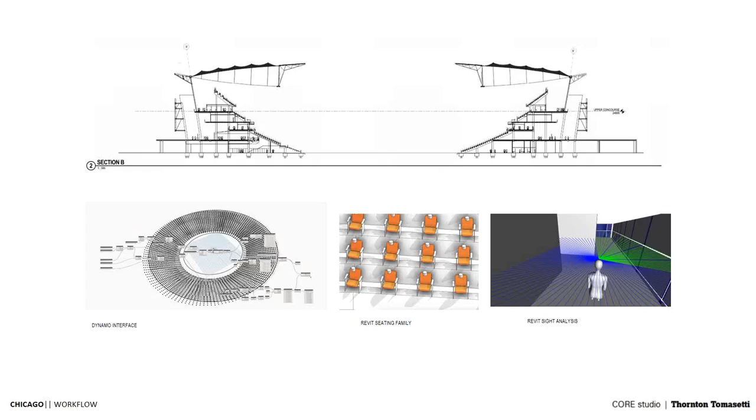And we gave a workshop with Populous, which is a pretty big stadium designer, and they have this kind of workflow as well. So it's pretty useful. You can do this for any building. If you're interior, you can do a line of sight, see if there's any obstruction. But we're using it for seating and confirming that the seating was correct in Revit as well. You can do kind of cool things like visualize elements and add parameters to that element if you need to.

We were also in charge of fabricating the roof fabric for this stadium. And I don't know if you ever have tried to build ETFE or saddle roofs in Revit. It's pretty brutal, especially because our building was not straight. Our building had a 2% slope for drainage and for viewing and for aesthetics as well. So the building was not straightforward. Our massing was changing all the time, so the fabric had to change all the time.

So we used Dynamo and we applied a family to create the parameters of the saddle shape. We used Grasshopper to also create this workflow where we're analyzing drainage flow of the fabric. And once we had a satisfactory shape, we would just bring it into Dynamo using just a simple depth parameter in our family. So I'll show you the process.

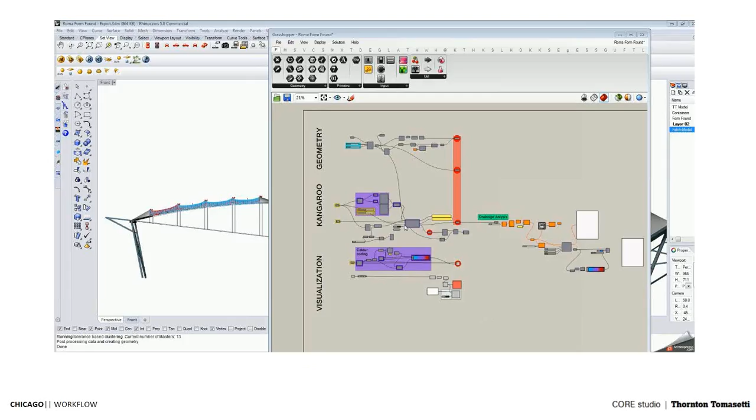So the process for this is form finding using Kangaroo. I don't know if you've heard of it. It's this physics engine in Grasshopper that allows you to do these kinds of cool form finding shapes in Rhino. So we were using this to write values to a CSV, and all I had to do is wait for the exercise to finish to have this optimal shape, and then just read that information back into Dynamo using just a basic parameter.

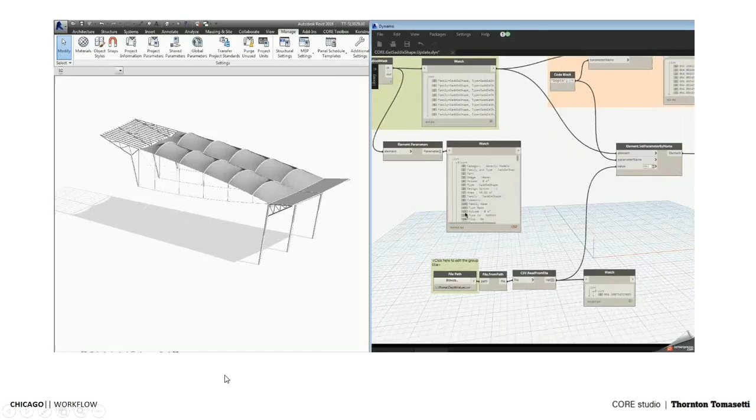So for this stadium, I built 3 different families: an exterior family, an interior family, and an in-between family we're calling the saddle shape. The saddle shape had a depth changer, so that's where the saddle will change depth. As soon as we got values from that Grasshopper model, we were able to call out the depth and change it once the information changed. So you see that right now it's 867. These are millimeters, I think.

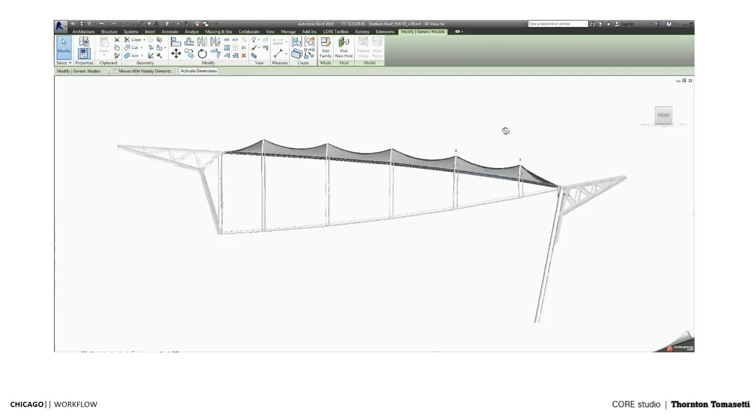So that's just something that I wouldn't know how to do a couple of years ago without the tool, right? So again, it's a process of creating an additional tool for you in Revit that you can use to implement things. In the first case it was the family for the rebar. In this case, we're just adding additional parameters to the family that we can change, and we can read that straight from a CSV file.

So at the end of the day, this is what we produced for that stadium. And coordinating that with the architects was pretty crucial, I would say.

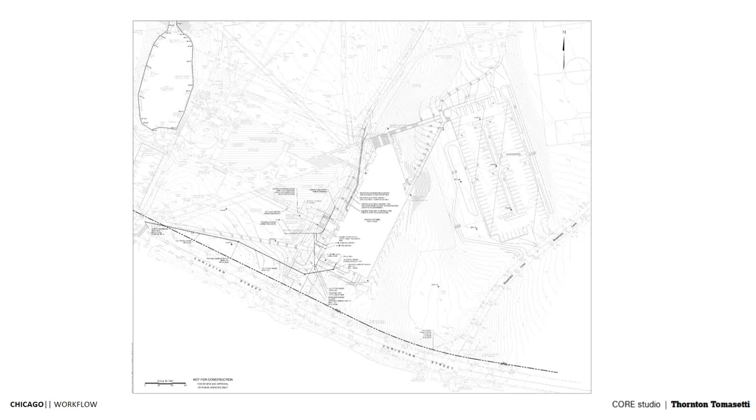This other thing that we did was something with topography. I don't know if you have dealt with topography in Revit; people don't use it a lot, but this was given to us as an exercise by the architect. So it was us, the architect, and the construction guys who were given the task to see who could come up with a better way to get volumes from excavating that site. We were given a CAD file. We turned that into a topographical map, and then we had a mass building. So the idea was to see how much dirt we need to get out from that CAD file. It was a pretty fun exercise.

So we used the Boolean nodes in Dynamo, and we just followed this, and at the end of the day, it gave you something like this, which is pretty cool. I don't know who won this, who got closer to it.

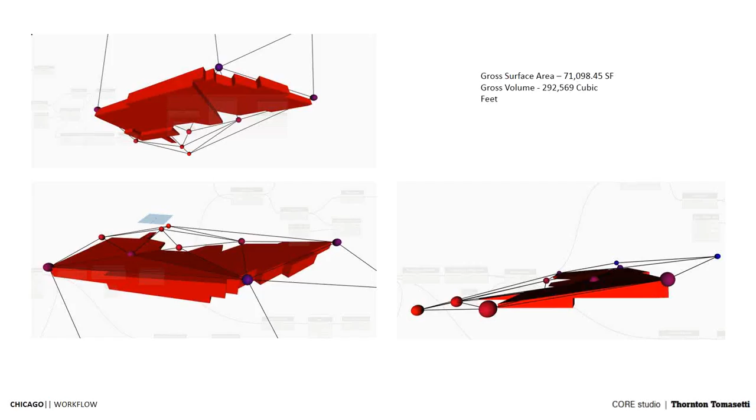I just got lost in the email, but we were able to know how much cubic feet of dirt there were in the site, and if you can put a price to this, then you can say, hey, this is how much you have to excavate. Can you give me a precise amount of dollars? So if you put monetary things to some of these exercises, then you get people talking about it.

The other thing was, how do you then see this kind of exercise where you have a contractor go to the site and do boring tests and see what kind of rock formation you have? This is important for us when we build high rises or any building. So if you have good soil, then you're good. If you have poor soil, then foundation is going to cost more, right?

So some of the things that we're trying to do is how do we take this 2D information into 3D and make it look kind of interesting and useful for everybody else. This is something that we're still working on. But this is the last thing that we're talking about, community.

All right. So I'm pretty involved in the Dynamo community here. I started it a year ago. We have about 1,200 people in the firm. There's probably 6 who use Dynamo in the whole company, 6 that are going out there and say, hey, you should use it for this, hey, you should use it for that. We give tutorials and workshops like here, but who are pretty active is only 6 of us, which is kind of sad, but it's fine. I get to do the cool stuff anyways.

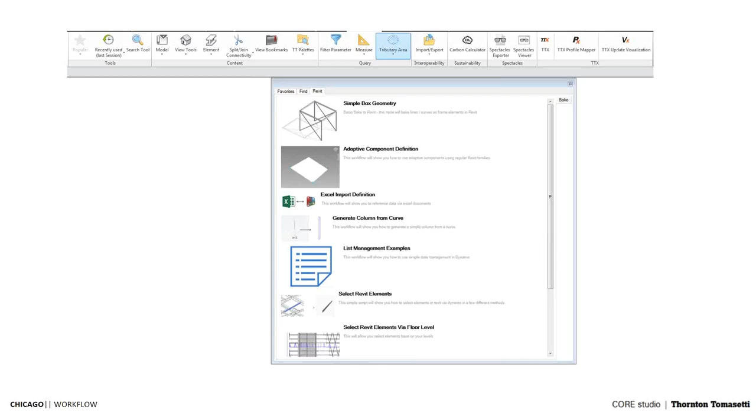So we have different things that people can use, like list management examples, read from Excel, adaptive components. What I've learned is, if you're gonna do this, put out things that are simple enough for people to go and do it, because otherwise they won't do it if it's too hard, too complicated. If you give them the definition that I have for that rebar, they'll look at it and go, oh, whatever, I'll never do this. But if you give them something that's useful, simple stuff, then you'll get them started on it, and they'll be much happier.

And the other thing that we do is we create these basic things, like the image of that definition, description, and packages that you're using. This is crucial for people who don't know the whole thing about Dynamo. You just point them to this and say, okay, this is what it does. These are the packages that you need. So I created a couple of them, and we try to do them as much as we can for people out there to use them.

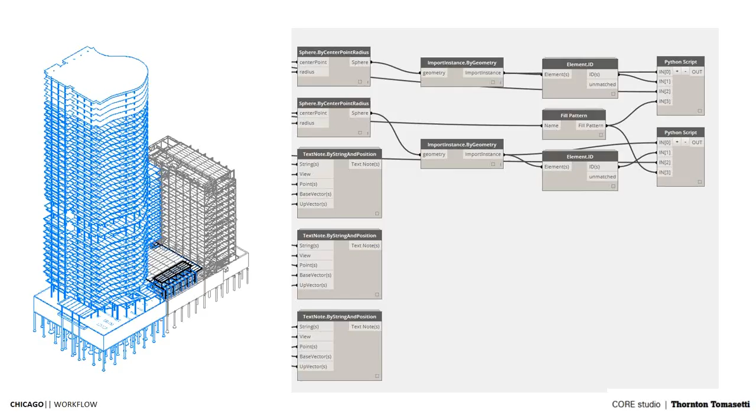Changing parameters, and then building custom tools for our groups here as well to visualize loads on existing building. So this is an existing building. We have a new design, so how much capacity the building has, or it can give you some sort of graphics. We've seen more and more that most of our practices want to see some sort of graphical thing like this in the reports. So we're trying to do things that do graphics as well, like 2D graphics. The other thing is just building tools for a company, or for engineers as well. Dynamo SAP.

And I think I'm just going to show you a couple of things that we're doing so far. I don't know if that's time. Is it time? It's a couple minutes. All right. Yeah, go ahead.

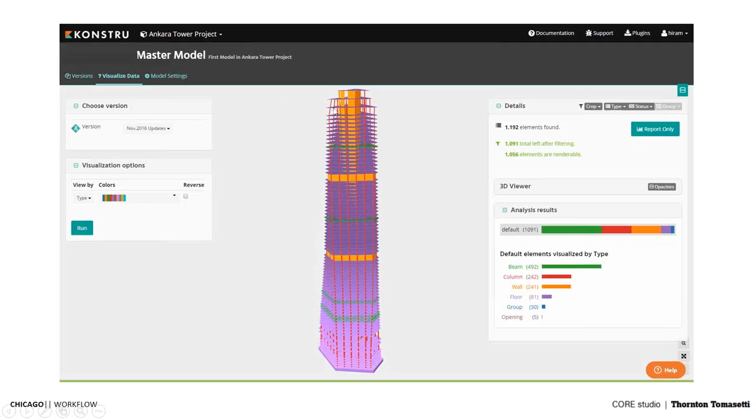So something that looks like this: you download this information, you create an account, and it takes you to a website where you can always access those elements. This is what it looks like. So it's a web viewer for BIM. And you can create a history of elements that got changed and visualize them in the web.

The previous platform to this was Spectacles. It's free. You can use it. If you have any questions, just shoot me an email.

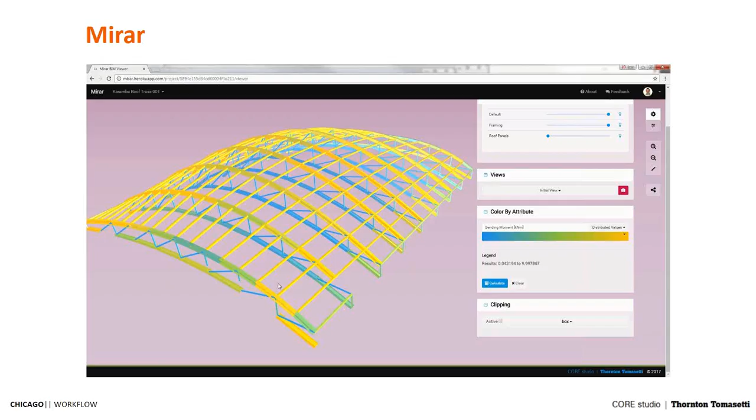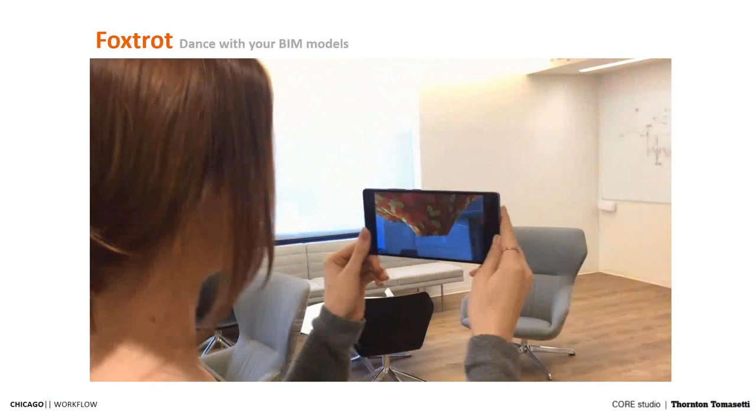So yeah, you can walk around and visualize what it is. And I think this is gonna come out. I don't know. We'll see. But I mean, this is all revolving around BIM. Now, if you can do all those in Dynamo and stuff like that, just put them up on the web. Nice tagline. Yeah, that's it. That's all I have. Wow, that's fantastic. Yeah.